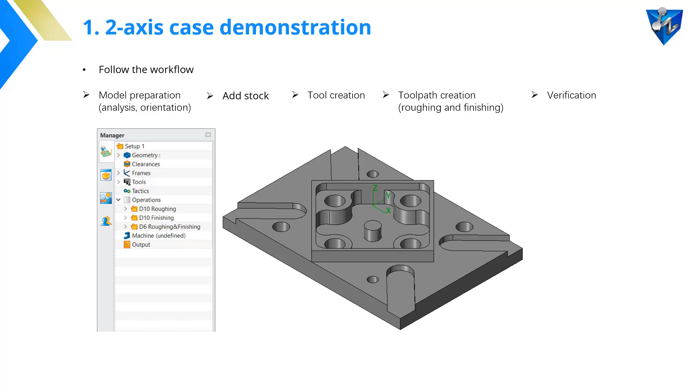Okay, now let's switch to ZW3D and begin the case study. Here is the part we are going to machine. We can create a CAM plan from the right-click menu. The first thing is to do model preparation. We can measure the size of the part. The length is 145. The width is 100 and the height is 20.

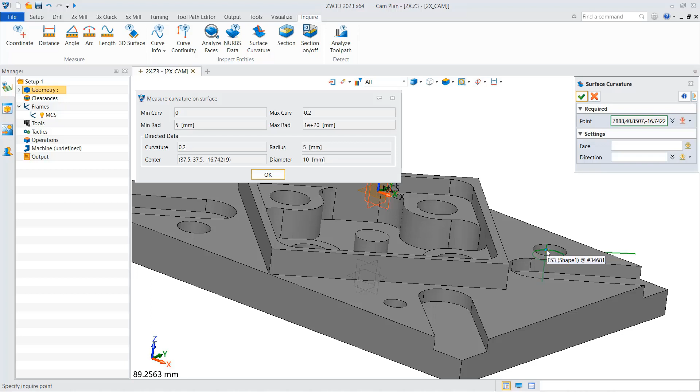We can continue to check: the minimum fillet radius is 5 and the holes' diameters are 12, 10, and 6.8. So we can use a tool with diameter 10 to do the roughing and finishing for most areas. And we can choose another smaller tool to machine the big and medium holes if we do not have such a driller. For the smallest holes, we can choose drill operation to machine.

We can also check the Z value of different planes by using coordinates. The top face of the middle cylinder is a little lower than the surrounding bosses.

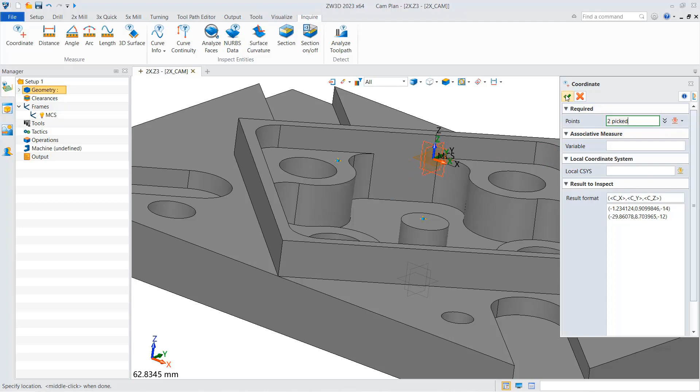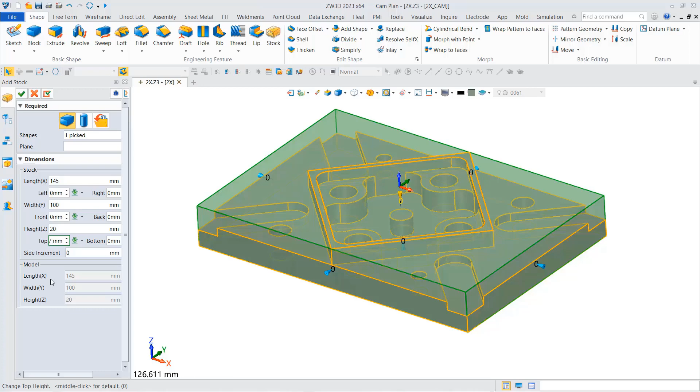Then we add stock. Suppose we have a stock that is 7 mm thicker than the part. Click Add Stock. Then set the top 7 mm more on Z-axis. From here, we can find that the orientation is proper. For other cases, you may need to adjust the orientation. You can do it in CAD module or you can create the frame here.

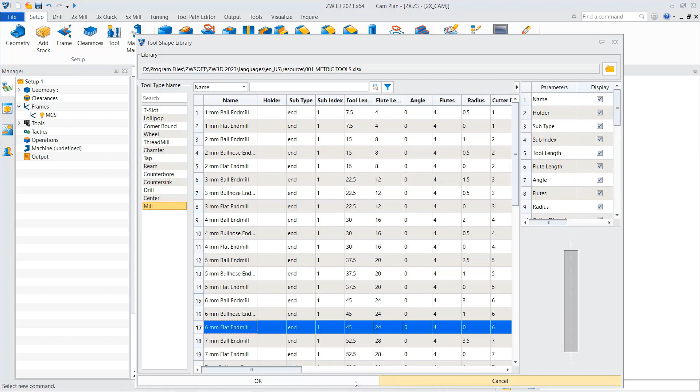Next, let's create the tools according to our analysis. Suppose we have flat mill tools with diameter 10, 8, 6, 3. We will choose tools with diameter 10 and 6. We can create it directly in Tool Manager. Or we can load it from Tool Library. We can modify the spindle speed and feed value.

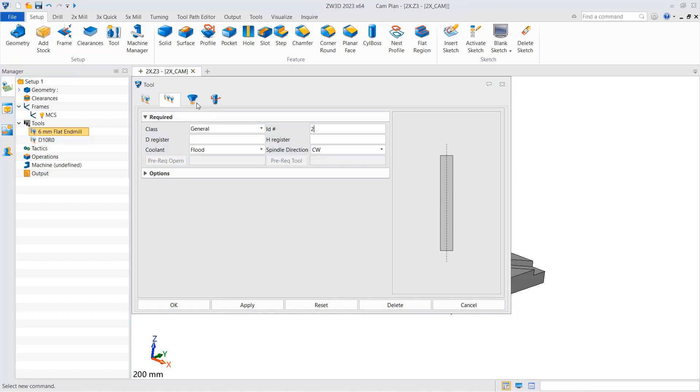Finally, let's start to create the toolpath. For the roughing, first we choose top facing operation to remove the excess material. This operation can also finish the top face of the stock if there's no excess material to be cut. Just select the part and stock as the feature, and D10 as the tool.

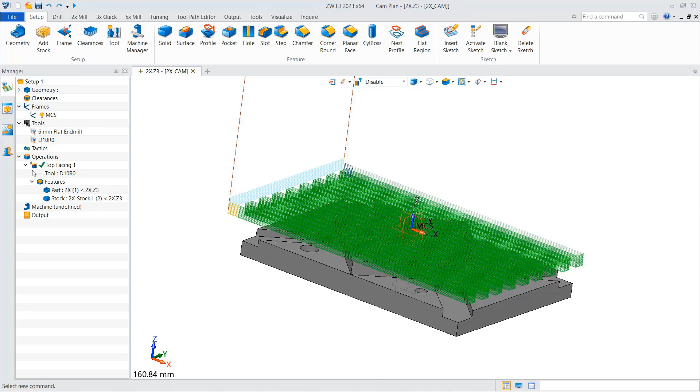Set the operation parameters. Because we use the part and stock as the feature, there's no need to set the limiting area. As to the tolerance and step, we just need to set the step down type, uniform depth, and value. And the rest of the settings we can just leave by default. We can double-click the operation icon to hide the toolpath.

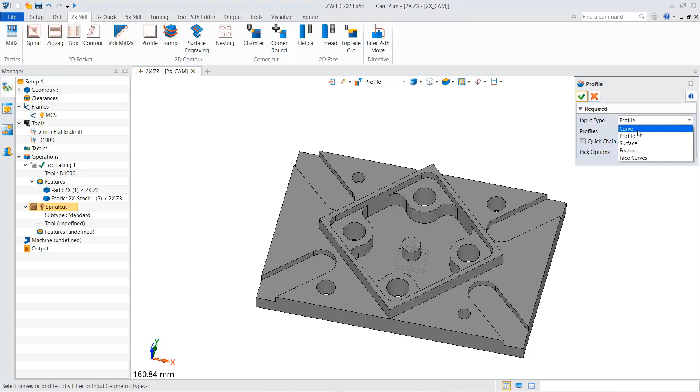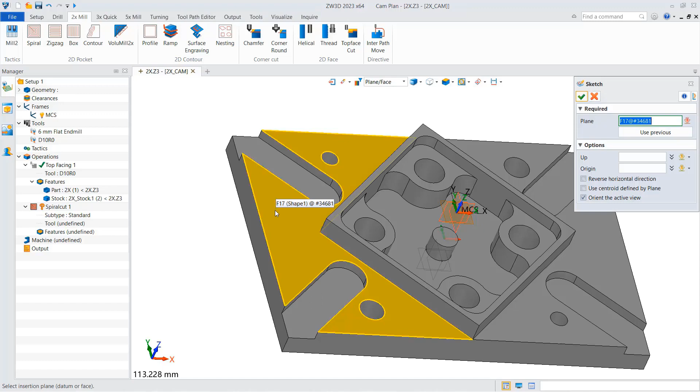Let's check the left outside area. We can machine it by spiral operation for roughing. This time we need to create a profile feature to specify the machining area. It is a little time-wasting to pick all edges for the profile here. We can just insert a sketch quickly. And then add the feature by selecting this sketch as the profile.

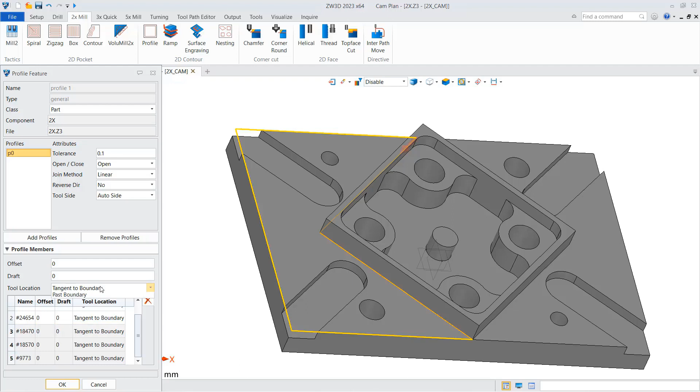Here we can see that this is an open profile, so we can set the open part's tool location as past boundary. After that, we choose the tool. Then let's check how to set the operation parameters. For limiting, we can set the top point.

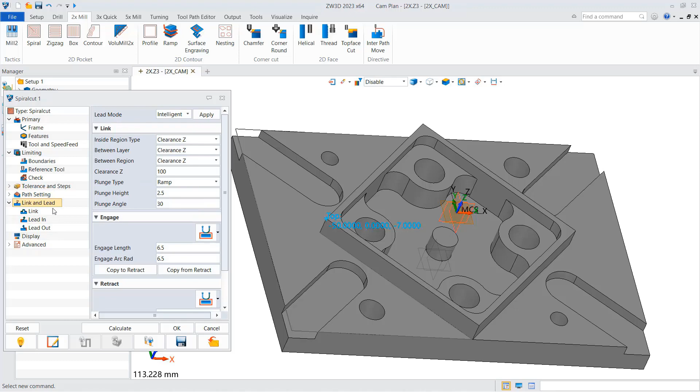For tolerance and steps, we set the step down type and the value, and also the side stock and bottom stock. Just leave the bottom stock for finishing. Then for path setting, we can set the side finish type as single cut cleanup, number 2, and distance. We can calculate to check the toolpaths.

As to the path pattern, here we can engage it from outside of the part. So we can select step inward and calculate it again. We can find the tool engages from outside now, which is much safer. We can also optimize the lead in and lead out. Set it smaller to improve the efficiency. Calculate. You can find that the engage and retract toolpath is much shorter, and it is still safe here.

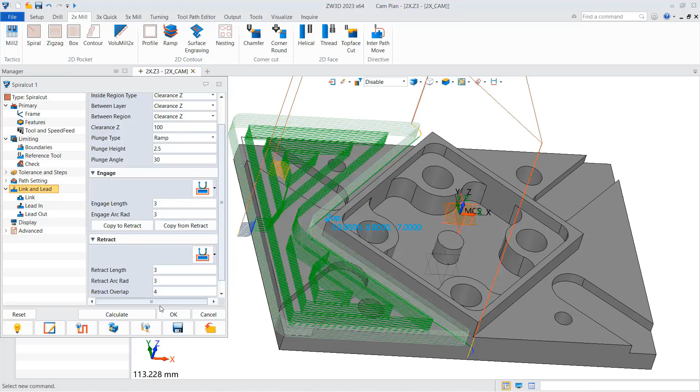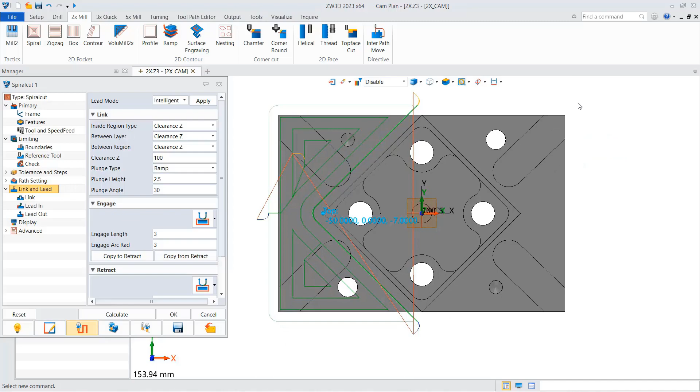We can put the tool to check. On the right side, we can just use mirror to get the toolpath.

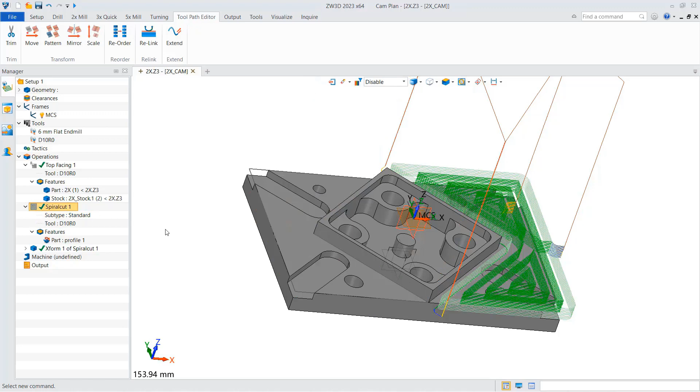Then we can continue to create the toolpath for these slots. This is an open profile, so we can use profile or contour operation. Here it is a narrow slot, so we will choose profile to show you. Click profile operation, create profile feature. Keep the tool location as tangent to boundary. OK, select the tool.

Go to Operation Parameter dialog. Set limiting. Bottom stock. Step down value. Side finish. And the link and lead. Calculate. Done. If you find the direction is incorrect, then go to change the machining side.

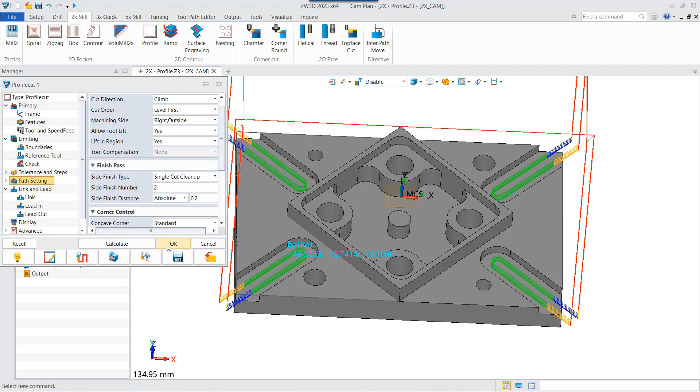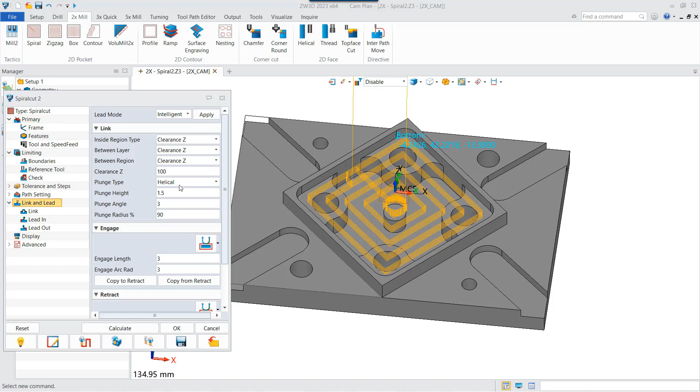In the middle pocket, we can use the spiral operation. Here you can see this operation is similar to the spiral cut one. The difference is that the tool location for the whole profile is tangent to boundary, because it is an inner pocket. The same as the spiral cut 3.

Now let's check this final pocket place. We can just duplicate the existing spiral operation. Then remove the feature and add a new one.

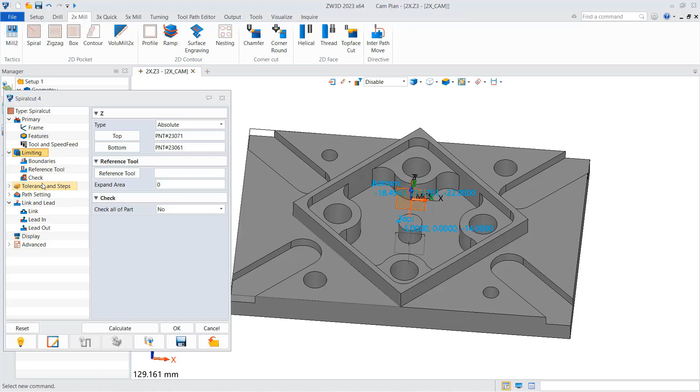Then we go to the parameters to redefine the limiting. Tolerance and steps, OK. Path setting, OK. Link and lead, the plunge setting is OK.

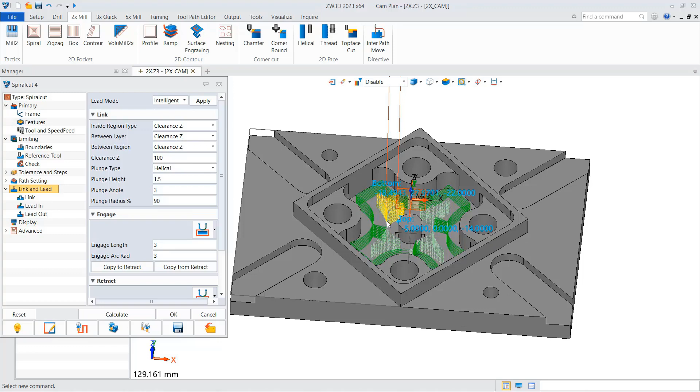Let's calculate. We can see that the plunge toolpath is not helical. The reason is that there's not enough place to go with the helical. We can just check—here the helical diameter is 9.

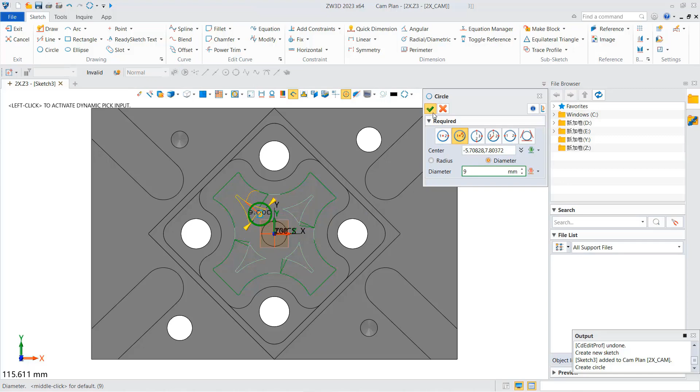We can draw a circle centered in the start point. The circle is the supposed helical toolpath. If we machine it by this toolpath, there will be a clash with the middle boss. So ZW3D deals with it by a secondary strategy, using a ramp toolpath intelligently when the helical cannot be met.

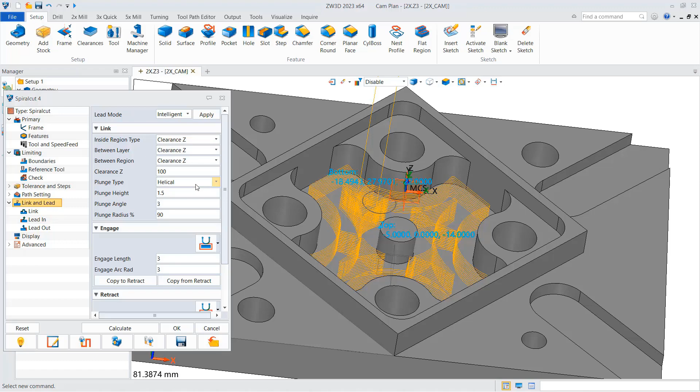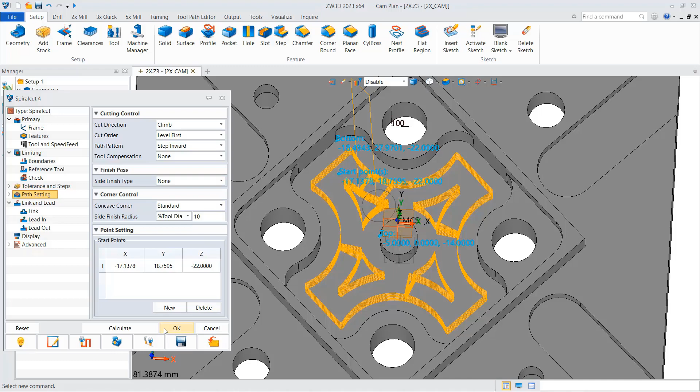We can also optimize it by adjusting the parameters, like setting the path pattern as step inward and specifying the starting point. Here we need to specify the point and click the middle button to confirm, then calculate. The plunge path is helical now.

There's also another point we need to pay attention to, such as this place. You can find the corner toolpath is too sharp, which is very bad for the tool. We can set the concave corner type as round.

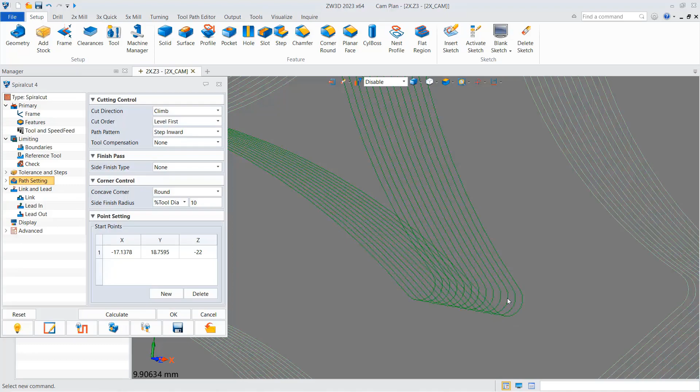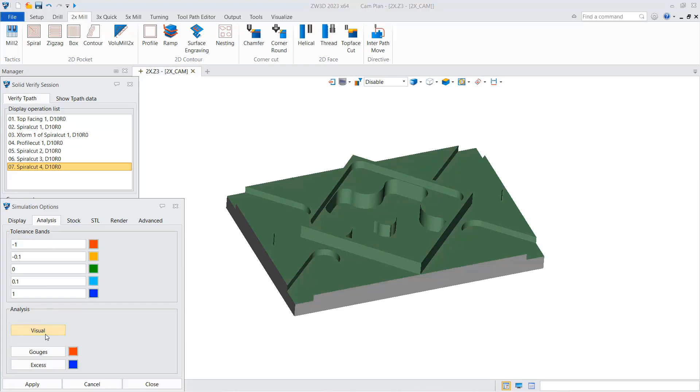Now we have finished all the roughing toolpaths. That's checked by Solid Verify. We can adjust the update interval and play to check the final result. We can click Options, go to the Analysis tab, and click Visual to check the left material.

It is obvious that except the holes, there are still some islands, and in the middle box we need to do rest roughing. Let's go check the corresponding toolpath.

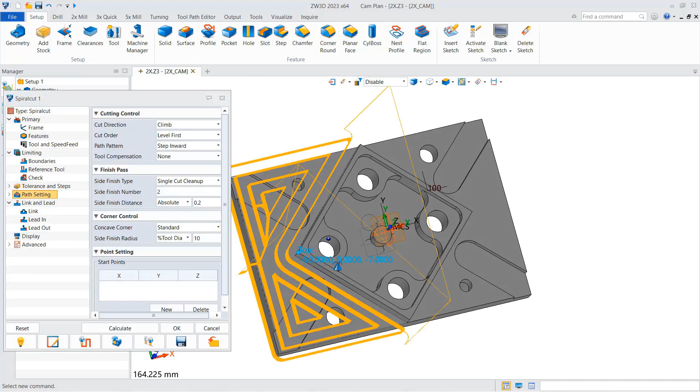Here we can find there's a gap, so we can just adjust the step over to a smaller value to check. Now it's okay.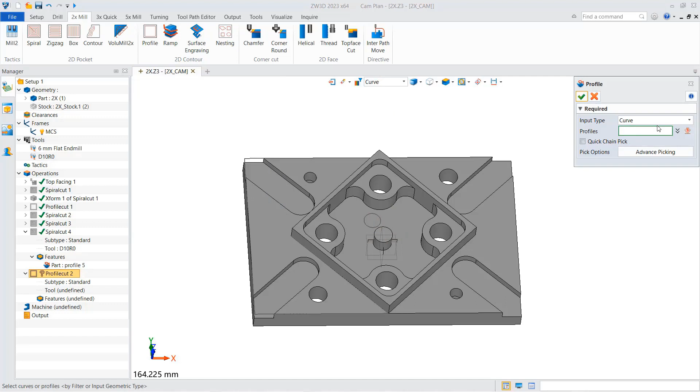To remove the left material around the middle cylinder, we can just add a profile cut operation and set the parameters.

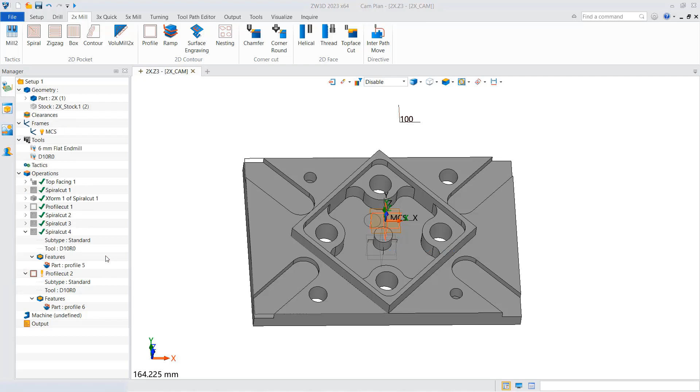After roughing, we need to create the finish toolpath. First, we can finish the outside area.

Duplicate the spiral cut operation, then modify the operation parameters. Due to the speed and feed of finish being different from the rough operation, we can adjust here.

Next we can set the limiting area. Bottom thick to 0, step down type as space only, and side finish type as none. Calculate. Done.

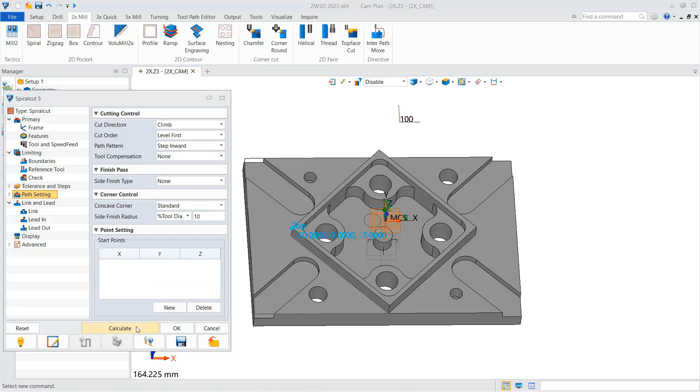On another side, we can mirror the toolpath.

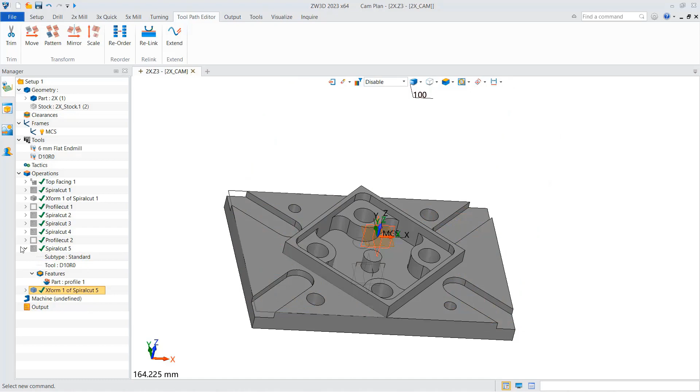Next, let's check how to create the finish toolpath for this area. We can use the contour operation.

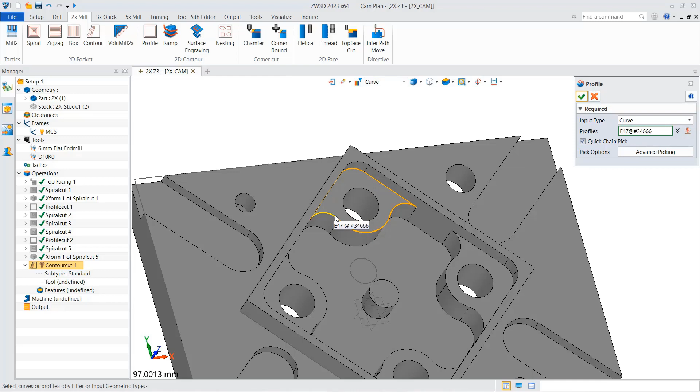Create the feature, select curves, and set the tool location. Then we choose the tool.

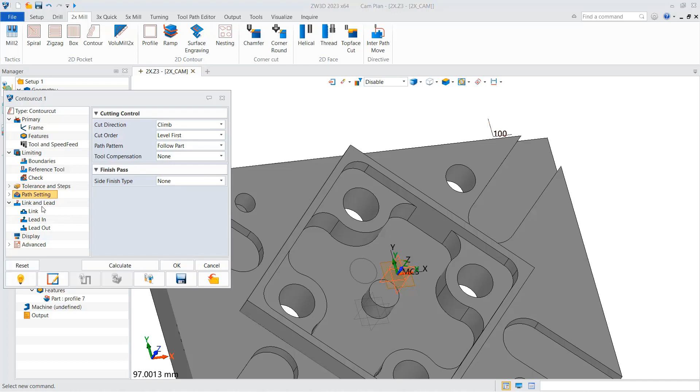And calculate. Of course, the result is not bad, but we still can optimize it. As we can see, we always go back to the initial level when we go to the next toolpath.

Quite good now. We can also set the lead in and lead out.

Another way, also a better one, is that we can set the cut direction to zigzag. Let's check the result—it looks much better.

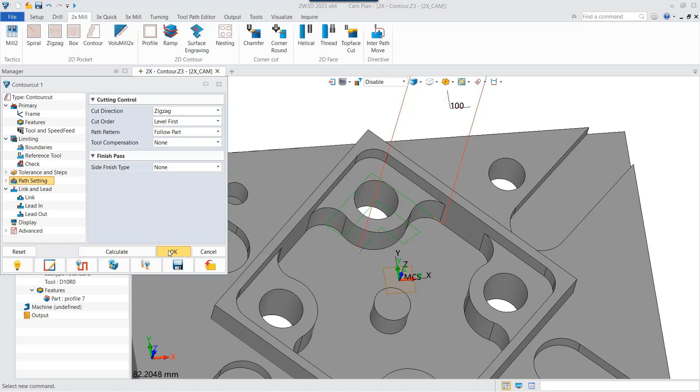Then we can pattern the two paths for the others.

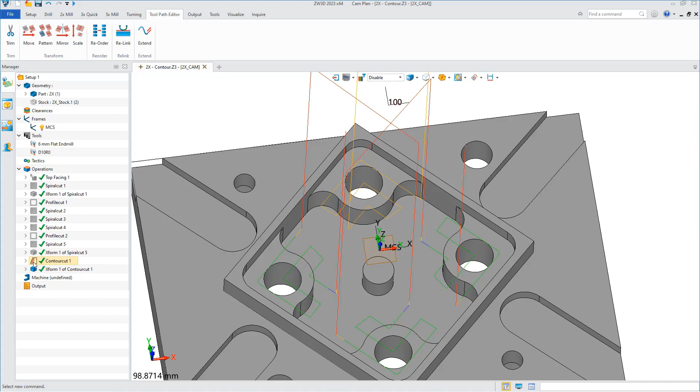We can add a spiral cut operation to finish the top face of the middle cylinder. Next, let's check the final finish operation.

Same way, we duplicate the spiral roughing operation and set the limiting areas.

Set the side thick and bottom thick as 0. Step down type as space only.

In path setting, to finish the side we leave, we set side finish type, number, and distance. Then calculate.

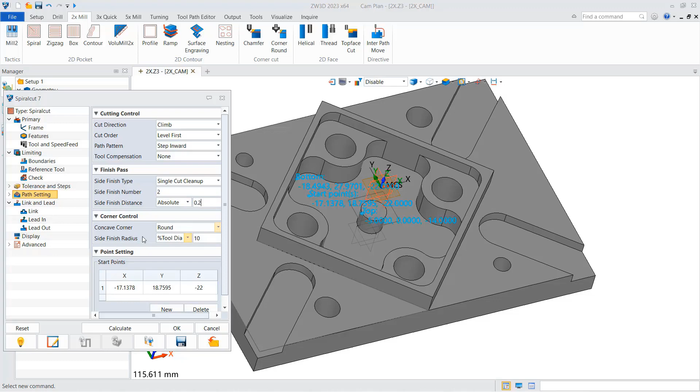Now we have finished most areas. There are many operations. To make it look tidy, we can create operation folders to manage them.

Roughing and finishing. And we drag the corresponding operations into their folder.

Okay, at last we need to create the toolpaths for all the holes. Suppose we have no big driller, so we need to machine the big and medium holes by mill tool. First, we can create a folder named Hole Machining.

Then insert the operation. Here we choose Ramp to mill the holes. Create the profile as feature.

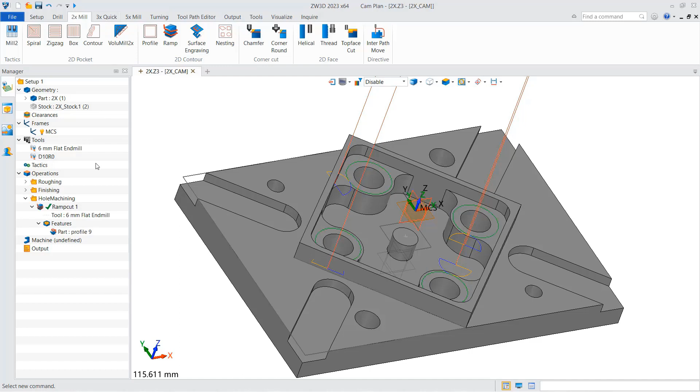We can find the machining side is incorrect. Go to Parameters, change the machining side.

Set the limiting area. Here we can specify the bottom point, and then input the value deeper than that to make sure the through hole is fully machined.

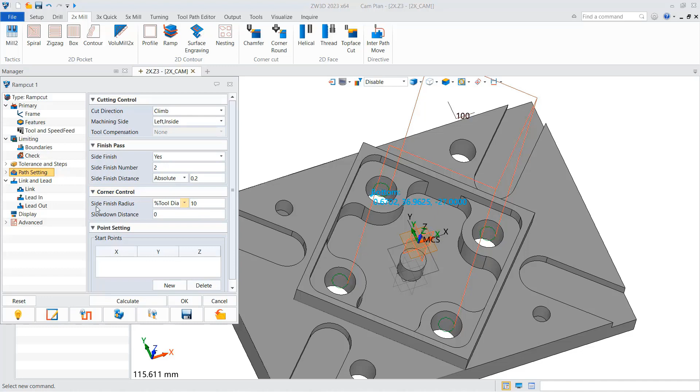Then set pitch, side finish number and distance. Calculate. Done.

Same way to create the toolpaths for the medium holes. As to the smallest one, due to us having the driller,

we can just insert drill operation and add the feature. Create the hole feature.

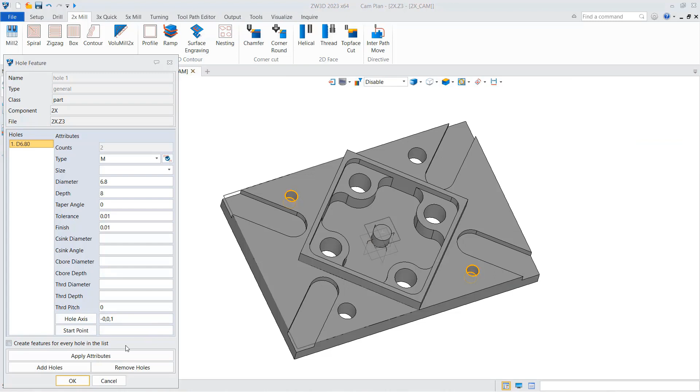Select the driller. We can load it from Tool Library.

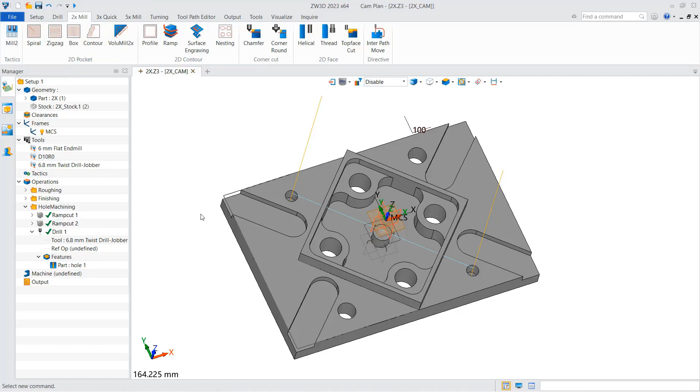Then we calculate. We can find that the link toolpath goes through the pad. So we can go to the parameters, adjust the return type,

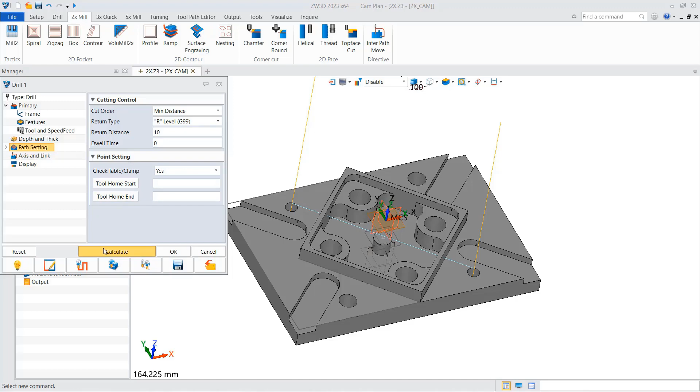or modify the return distance to a little higher, like 10. Recalculate—better now. ZW3D also provides an auto avoid solution.

As long as we include the pad as the feature too, it will avoid the collision with the pad automatically.

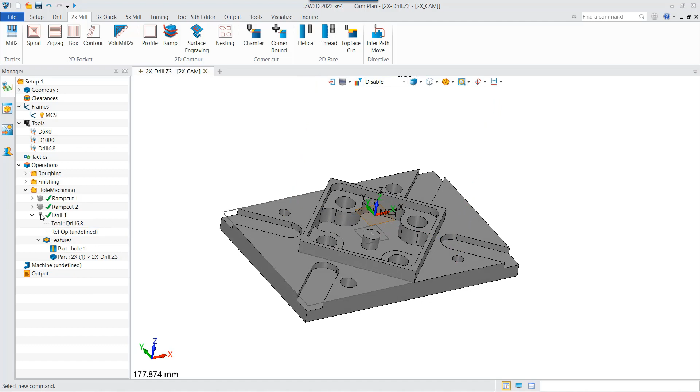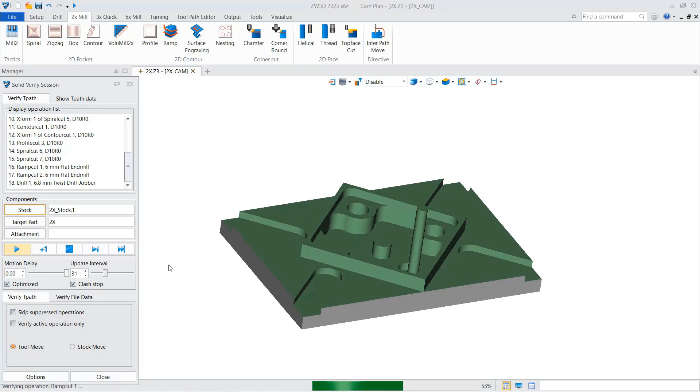Till now, all toolpaths are done. So we can use Solid Verify to check the result again. Okay, the result is quite good.